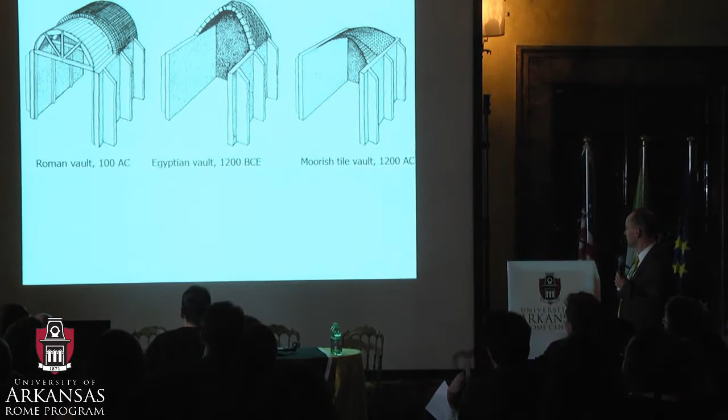And the vault I was just showing you, the Moorish tile vault, is developed in the medieval period. The earliest one we know is from around 1100. We've pushed that back 100 years in Marrakesh. And the Nubian vault is in the center.

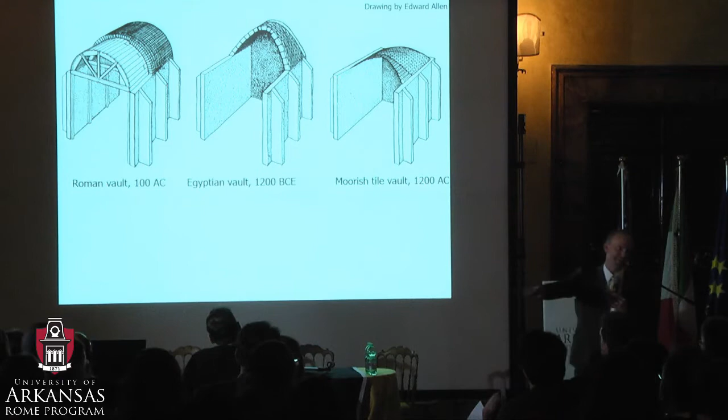The Roman vault has a real problem: you have to use a lot of timber to build the formwork. So if you're in a location in the Mediterranean that doesn't have a lot of wood, you need to find some way to build quickly.

This tile vault was developed and taken to the United States by two immigrants, Rafael Guastavino Sr. and Jr. They built 1,000 buildings all over the country, including a Scottish Rite Temple in Little Rock that I need to get to someday. If anyone's there sometime and can get a photo and send it to me, I would appreciate it.

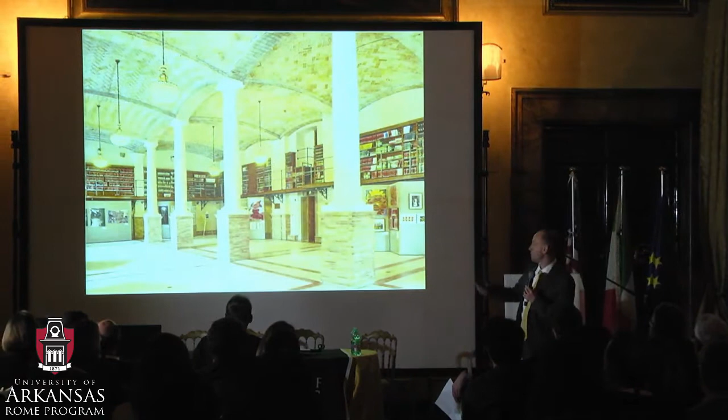Here's Guastavino Sr. He was hired by Charles Follen McKim in 1889, five years before the Academy's founded, to build the Boston Public Library. We've been researching their work, and in early train stations—this is New York's first underground subway station, which the Guastavinos built.

They completed the dome in 14 weeks. It's the size of the Pantheon, only 4 inches thick, 10 centimeters thick. It was meant to be temporary. It's been there 100 years.

In my research on the Guastavino family, I found several hidden figures in American architecture who hadn't been fully appreciated. Julian Abele is an African-American architect who designed most of the Duke University campus, including the chapel. He was totally unknown at Duke until about 20 years ago, and now, two years ago, they renamed the main quad after him. He worked closely with Guastavino Jr., and that's an incredible story in American architecture we're only beginning to tease out. He worked at Horace Trumbauer in Philadelphia, was born and raised in Philadelphia, and educated in architecture at Penn.

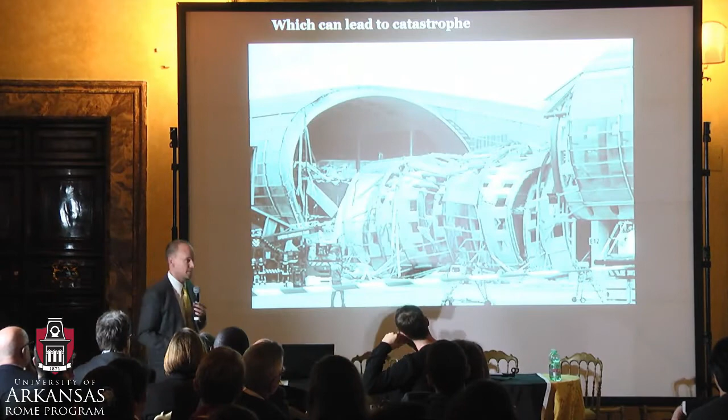This is the Charles de Gaulle Airport. This is a one billion euro failure. It collapsed at about 7 o'clock in the morning. Four people were killed. It was a calm day. If it had collapsed three hours later, we could have lost 150 people or more.

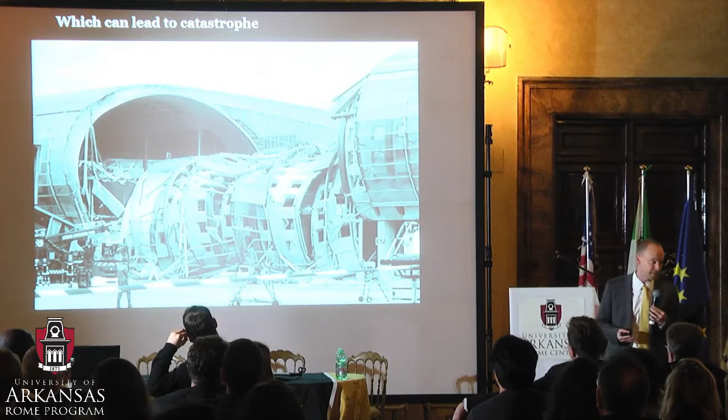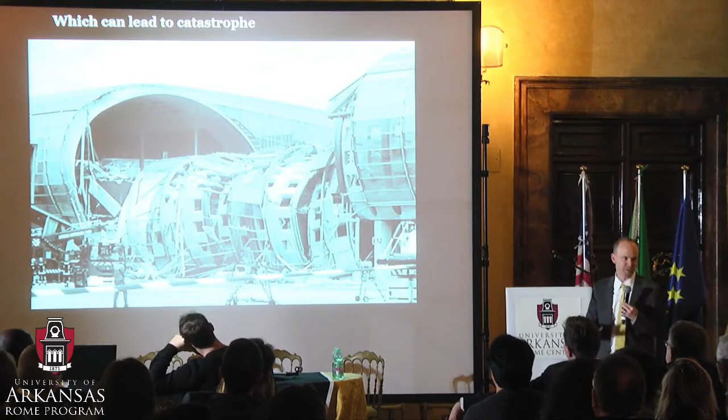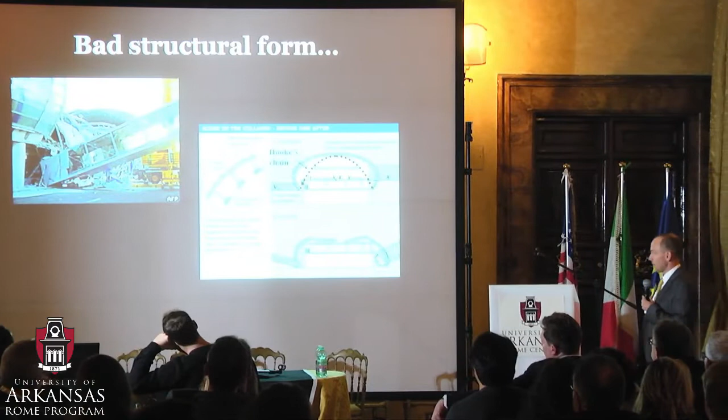It's a terrible tragedy, and yet, for those of us working in architectural design, it's quite easy to create a curve, extrude it into 3D, and hand it off to someone to make it stand up. That, to me, is a broken way of practicing. We need to think more carefully about how we're generating form, how we're working with contractors and engineers, how we're thinking about materials. Frankly, this is poor form, and we as designers have many analysis tools but very few design tools. So in my group at MIT, over the last 17 years, we've been developing design tools, taking inspiration from history, in particular graphic statics, for discovering form.

Gaudi's inclined walkway in the Park Güell is not a psychedelic form that he built when he was tripping on acid. It's a deeply rational form, a soil retainment system, and the form is found through graphic statics.

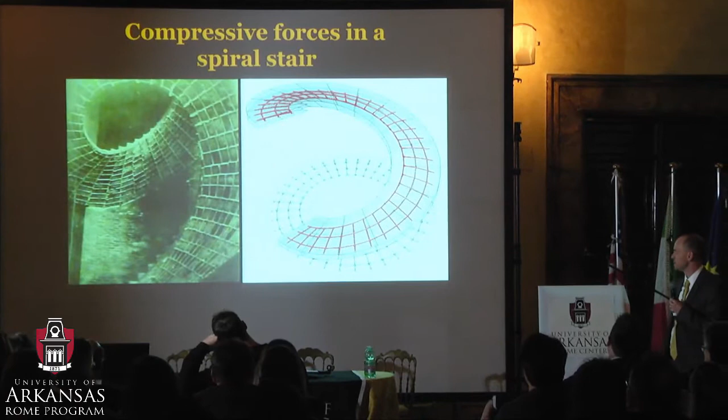In a book called Form and Forces, we developed these techniques, and our research students have pushed it into three dimensions. You can download Rhino Vault if you're an architectural student interested in designing vaults, pushing compressive surfaces into three dimensions, and explaining how things like these insane spiral stairs by the Guastavino company can stand up with no steel, even if the building code says this isn't possible or legal.

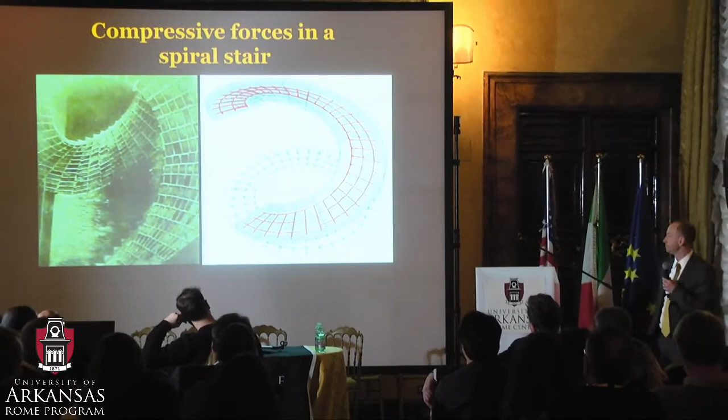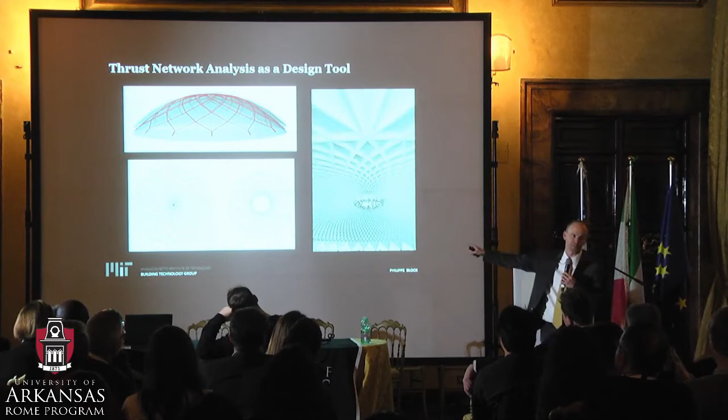I want to bring it back to Rome. We took Pierluigi Nervi's Palazzetto dello Sport and started studying it using Rhino Vault. I don't have time to go into it, but the images on the lower left show one is the geometry of the structure, and the other is the calculation of the forces in the structure. It's called a reciprocal diagram.

Because it's reciprocal, the image on the left could be the geometry and the right the calculation, or the image on the right could be the geometry of a dome with an oculus, and the image on the left the calculation of the forces. There's a great richness in these methods, and we've been trying to revive them.

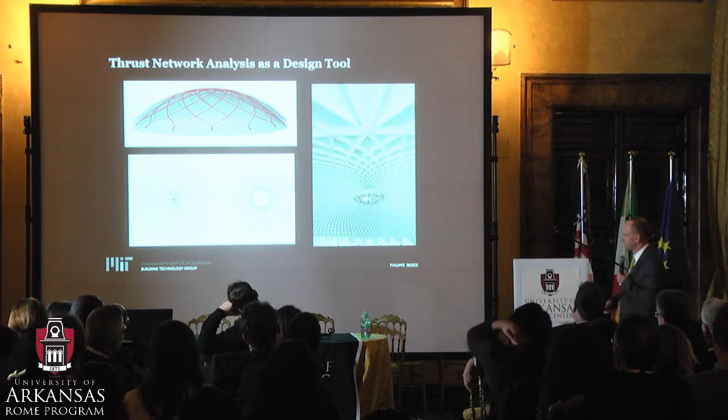I just have to take a little detour into this remarkable building, the Palazzetto dello Sport. If we think about Rome in the 1950s, it's right after World War II, the Olympics have been awarded, and there's a shortage of steel and cement. Pierluigi Nervi develops a geometry using ferrocemento, essentially very thin bathtubs.

Nervi had developed this system so well that they built the entire dome in 40 days. Imagine doing this with no computers, in 40 days, in 1957. The Olympics were in 1960, so here's a project that finishes ahead of schedule and under budget three years before the Olympics. Can you imagine that?

And Nervi - I want to highlight this aesthetic point - said that the easiest thing to do was to have the dome go straight across between these Y-shaped buttressing supports. But he said, that's not natural.

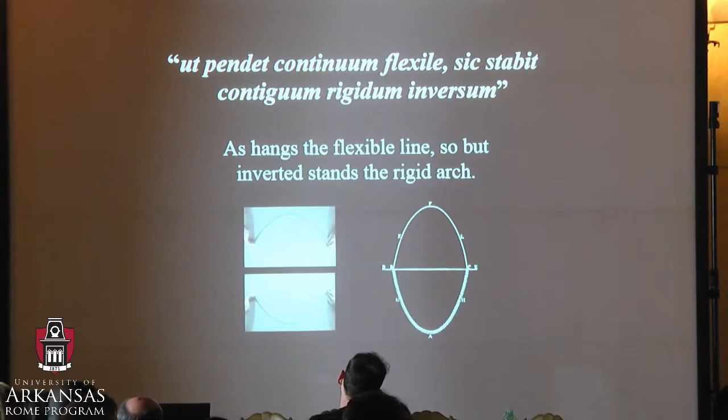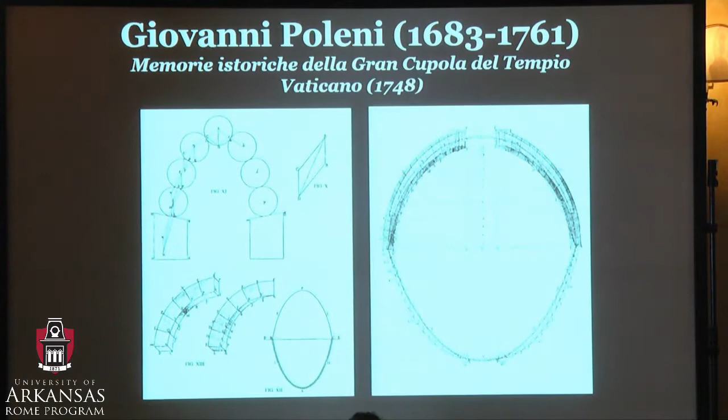Just a little bit about structures class. You've probably all heard of the Gaudi hanging models. If you hang a chain with weights, freeze it, and invert it, it's an ideal shape in compression. Poleni applies that at St. Peter's. St. Peter's cracks in the early 1700s, they're really concerned, and they use this system to prove that, in fact, the dome is safe.

A few years ago, steel bars were put in this. They said after 2,000 years it doesn't stand up. Before I die, I want to remove these steel bars, because I always say to my students, if you do a calculation that says the building doesn't stand up and it's been standing for 19 centuries, it's not the building that's wrong, it might be your calculation.

And so developing a sensitivity toward how historic buildings work. Of course, in Italy there is a danger of earthquakes, and it's in St. Francis of Assisi, there was very sadly a collapse in 1997. We lost frescoes, and in this terrible moment 4 people lost their lives. A much heavier roof had been added in reinforced concrete just a few years earlier, replacing a timber roof. The building had survived much larger earthquakes for 6 centuries, and so how we intervene in historic buildings can help determine how they survive future events.

And of course, this is an ongoing saga with the intersection of natural hazards and cultural heritage, which is a major challenge, and I think an area where we can build collaborations as researchers between Italian universities and American universities.

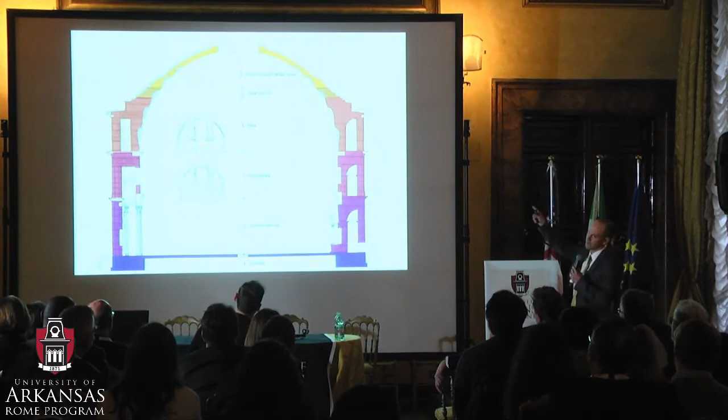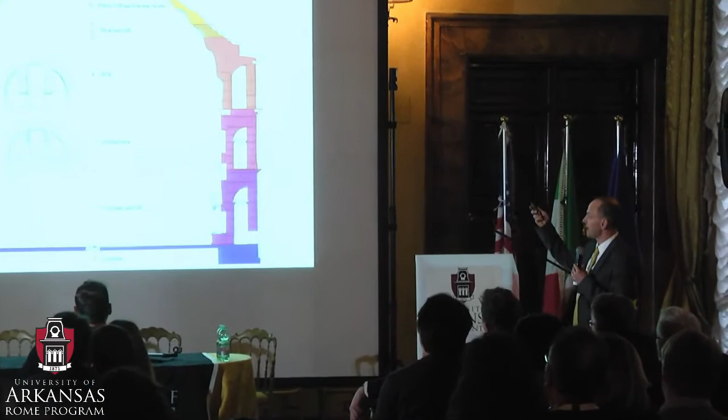And I can't really talk about learning from Rome without saying a little bit more about the Pantheon. My students and I have been studying and trying to prove that this building is safe under any possible earthquake that Rome could throw at it. In particular, if we think about the structure with these magnificent relieving arches that allow for openings and voids in the interior, this drawing by my colleague Lynn Lancaster shows the fact that the Pantheon has much lighter concrete in the crown of the dome, almost light enough to float, using the very lightweight pumice stone. The density is almost half at the crown what it is lower down in the travertine and brick sections. This is more or less what that lightweight pumice looks like.

But what many people don't know is the last time the plaster was off the interior, there are cracks all through the interior of the Pantheon that are about 20 centimeters wide, 8 inches wide. They're radial cracks, and the dome is cracked, but it's absolutely stable. Lancaster has studied the geometry of this, and we've been doing 3D printed models to study the stability under earthquakes.

And 2 students, Anna and Juanita, a few years ago came to Rome, and this is the shocking discovery that all faculty have when they send students to Rome - I thought they were going to just have a good time, but they actually did a huge amount of work while they were here. They built a 3D model, which we 3D printed at 1:100 scale, and then we tilted it to show that the Pantheon could resist up to 0.5 g, so half of gravity applied horizontally.

The maximum expected ground accelerations in Rome are maybe 10 to 12% of gravity horizontally, so this is 4 or 5 times more stable than the largest earthquake we expect to happen in Rome. So if anyone comes and says the Pantheon needs a new jacket made of carbon fiber or steel, we're prepared to stand up and say, please don't touch that building, because it obviously has incredible stability.

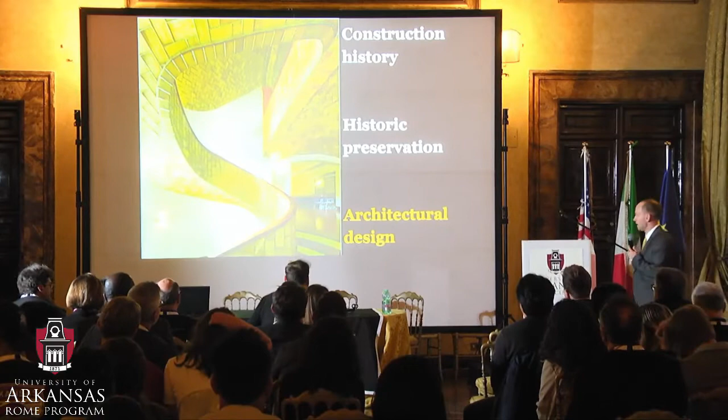I want to close with 4 brief projects and how our work in construction history and historic preservation informs design, and hopefully demonstrate that it's possible to really look backward and forward simultaneously.

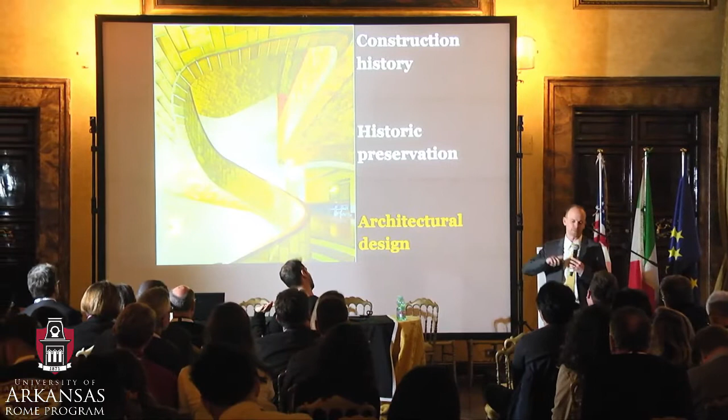Our first major international project was in South Africa. A colleague of Marlon's, Peter Rich, called us and said, we want to use local materials, we want to use local labor, and use passive systems. So we developed an idea using arches with basic earth bricks.

Compressed with 7% cement as a binder, so almost all of the materials were produced locally, using this tile vaulted system to build a series of long span arches, unreinforced. There's no steel. These are stable through their geometry, through double curvature and through earthen bricks. This project was an exciting chance to bring research into practice, and we built a series of vaults and domes. Apparently there were giraffes walking through the construction site.

In 2009, to our great surprise, out of 600 projects entered, it was named World Building of the Year, and it was a great privilege to work with Peter Rich on this project.

What I want to point out is that by using local material and efficient use of the material, the amount of embodied carbon it took to build the project was about 60 kilograms per square meter. As a reference, the London Olympic Stadium was about 4 times that. So obviously we're not going to build the London Olympic Stadium out of earthen bricks, but the idea is just to get literacy in terms of the carbon impacts of construction.

My colleague Meejin Yoon was asked by the memorial committee to design a memorial, and she came up with a geometry in granite, large granite blocks. This was one of her initial design concepts. Then using historical ideas from masonry vaulting, we said each leg of this structure needs to have an arch that works in compression. We developed tools that allowed her team and the whole design team to explore hundreds of different geometries, but always have stable geometries in stone.

We used 3D printed models to explore construction sequencing. Here you see we're building the 5 legs and going toward the middle. All the tolerance gets thrown toward the middle if you do that. Our challenge was to have the vault be as tightly built in the center, so we actually started with the keystone and worked backwards to shed all the tolerance into the 5 legs. We CNC'd the blocks in Wisconsin with Quarra Stone.

A giant robotic arm with a diamond blade is kind of something out of a horror movie, frankly, but as long as you have tight control over the console, I guess it's okay. We were able to get accuracy to within about 1 millimeter in the fabrication, and you can see here's the keystone on the left coming together, all supported on scaffolding.

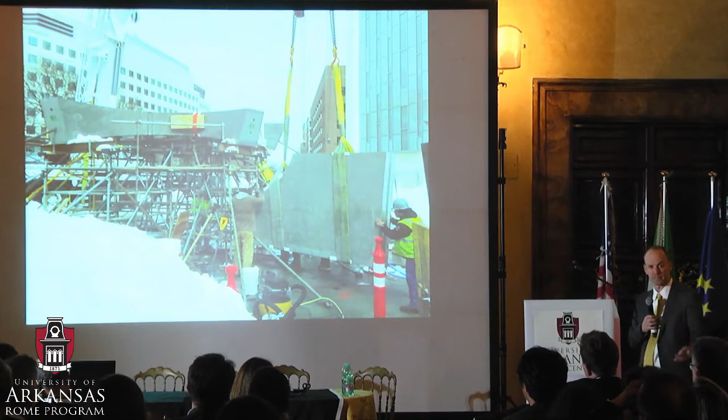Then we got 3 meters of snow. Every weekend we'd get this much snow. That slowed us down a little bit, and our German engineering colleagues on the project didn't believe it would stand up, and they insisted on putting steel pins, which I was not terribly pleased about. But we did a big science experiment where we supported it on scaffolding with 5-ton bathroom scales under each leg. The pins went in ungrouted.

We lowered the scaffolding and proved that all the load got transferred in arching action, so it worked as an arch. Here we are in Rome. Arches work. Stone on stone, if you get the geometry right, it stands. And here's the design team underneath the vault.

And here we are at the opening on the second anniversary of Officer Collier's death. This was 9 months from design to completion, with me, Meejin Yoon, and Eric Höweler. Bob Asmar was the lead stone installer.

He was a pretty gruff and serious guy, and one day I got a call from him. He said, 'John, I just came back from the DMV. I got a new vanity plate.' I was like, 'Oh yeah, Bob, what'd you get?' Equilibrium. He believes in equilibrium now. So if you're ever behind a truck with this plate, you know it's the guy who built that memorial. And that was the first time I ever saw him smile, actually.

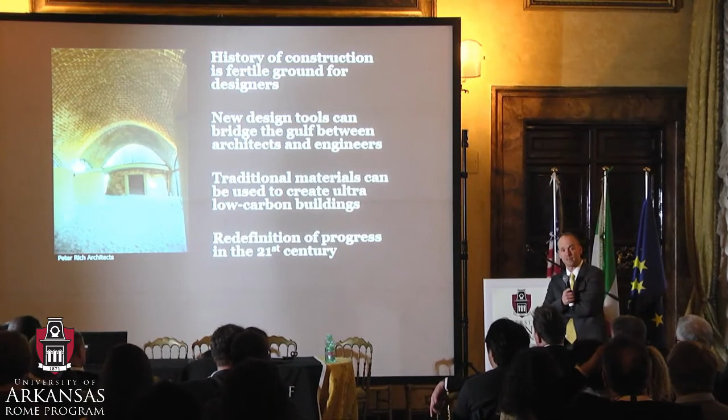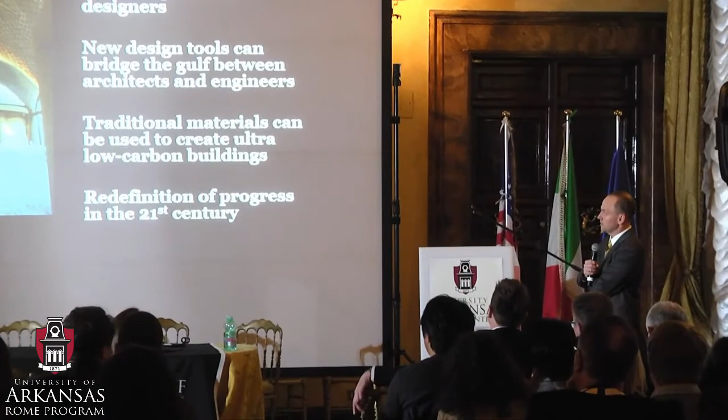So I'd like to close by saying what a fabulous honor it is for me to be here, how important it is for me to continue to strengthen ties between the American Academy in Rome, going into our 125th year, and all of the Rome programs that are often starting with architecture like we did and expanding into new disciplines. Fundamentally there's so much to learn from history, there's so much to be invented, and frankly the world needs creative young people to work on the tough problems. So I hope I've given you some ideas of things to work on.